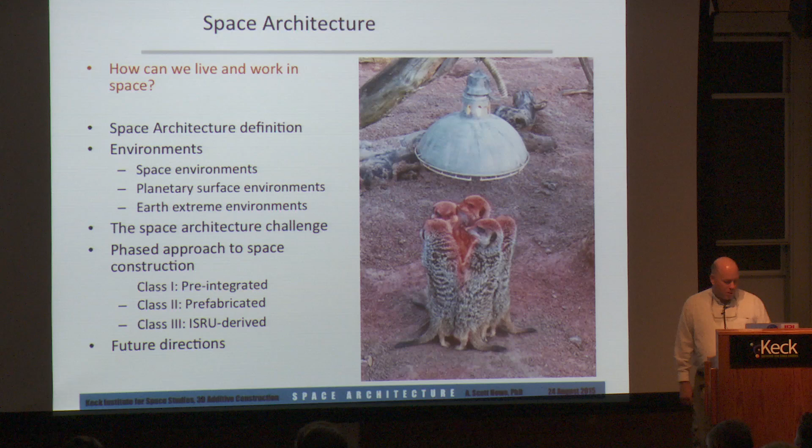And space architecture is somewhat trying to address this, addressing different space environments. Also, we've come up with 3 classes of structures that we are working towards that will give us a phased approach to putting humans out into space for permanent habitation. So with that, there's a lot of definitions of architecture, and this is mostly having to do with earthly architecture. Some of these are somewhat amusing, and some of them are kind of interesting. They're mostly applicable for what we see here on Earth.

In particular, the last 2: Mies van der Rohe was an architect who really prided himself in knowing how the structure and the function worked, and so he came up with the term less is more. Robert Venturi, who was kind of bored with that and wanted more art in it, came up with less is a bore. So there's a lot of different opinions on what architecture means.

However, what we're going off of is the space architecture definition, which takes off of earthly architecture, and we define it as architectural design of living and working environments in space related to facilities, habitats, and vehicles. Designing these forms of architecture presents a particular challenge to ensure and support safety, habitability, human reliability, and crew productivity in the context of extreme and unforgiving environments.

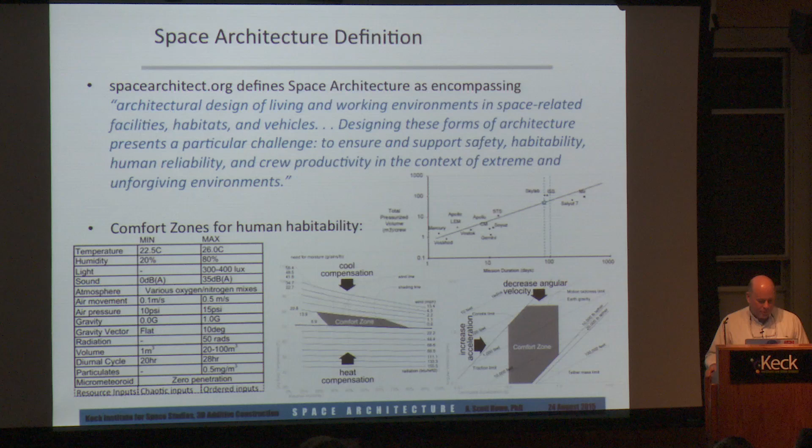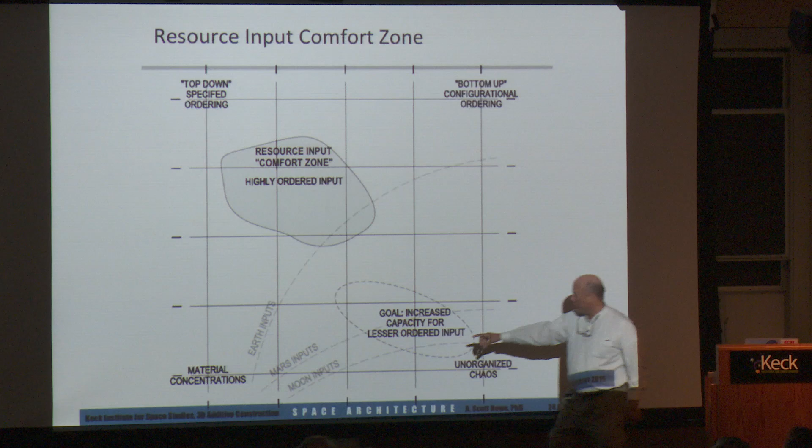That's where we already have oxygen on Earth. We have a kind of a temperate climate. The pressure is already correct. Here we can just walk outside, no problem. So it's highly ordered already. And what we want to do is build in these environments down here, which you can see slightly grayed out, Mars, Moon, and obviously a lot of other environments as well that we can add to that, so that we can mitigate these comfort zones such that humans could live in those environments

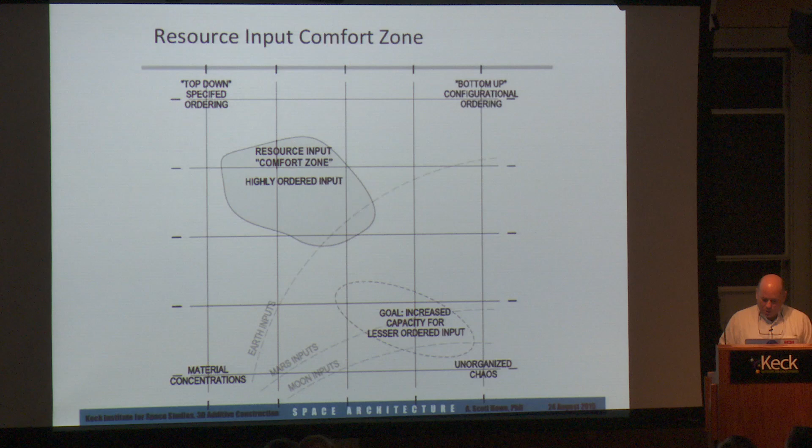as well. So far the realms of space architecture include orbital environments, deep space, and also planetary surfaces such as lunar, Mars and asteroid surfaces as well. And then we also include Earth extreme environments such as polar bases, under the sea, emergency housing after a natural disaster or some kind of chaotic unrest.

As I go through this, we will talk a little bit about some of these environments, but we will put it in the context of how that can influence ourselves back on Earth now. Can we have some rollback of some of that technology as we go along and benefit us here as we go outward as well? So the space architecture challenge then is to try to understand the extreme environment, and to work with the capacity of the transportation system, which is very difficult.

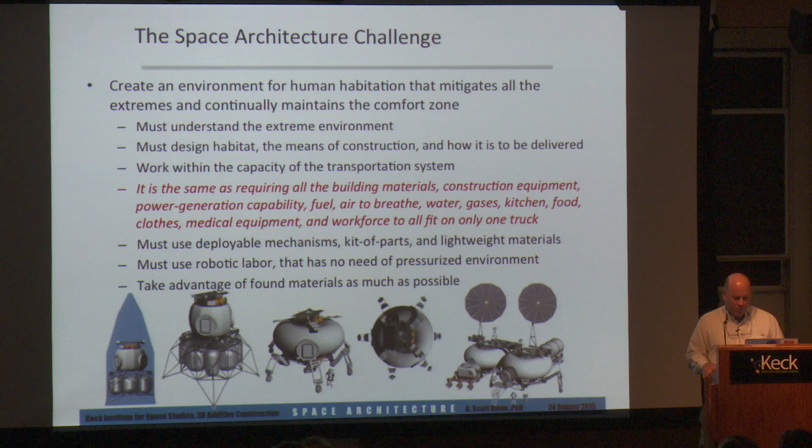So what we've come up with is a phased approach to space construction, which has 3 classes of structures. The first one is pre-integrated. The second one, class 2, is prefabricated, and then finally class 3 is ISRU derived. This phased approach occurs over time, where the technology level gets higher as we go along, and also over time we're able to accommodate larger and larger crews or larger numbers of inhabitants.

So I'm just going to go over these 3 different classes and structure the rest of my lecture around this, and show some of the ideas we've been addressing for building the 3 classes, and then also the actual real tests and things like that we've been doing for prototypes.

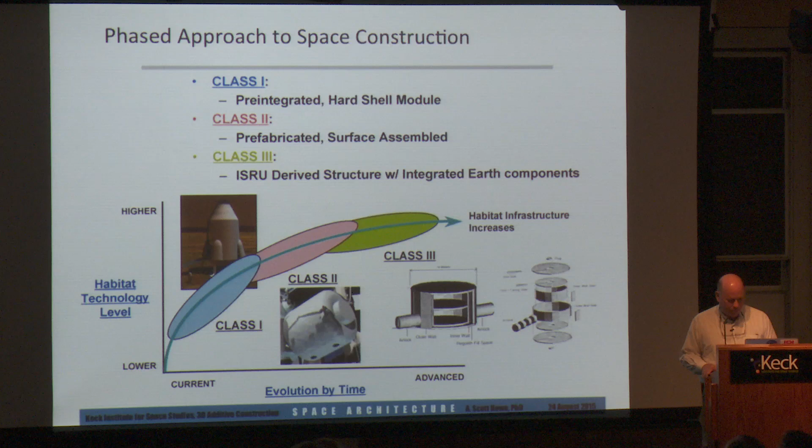And then, of course, in space, the similar example is the lunar module, which was the descent vehicle as well as the ascent vehicle, and the crew lived there on the surface in the module, and there was no assembly required, nothing needed to be done. It was already habitable as it went. So I'm not going to spend that much time on Class 1 because we've already gone past that.

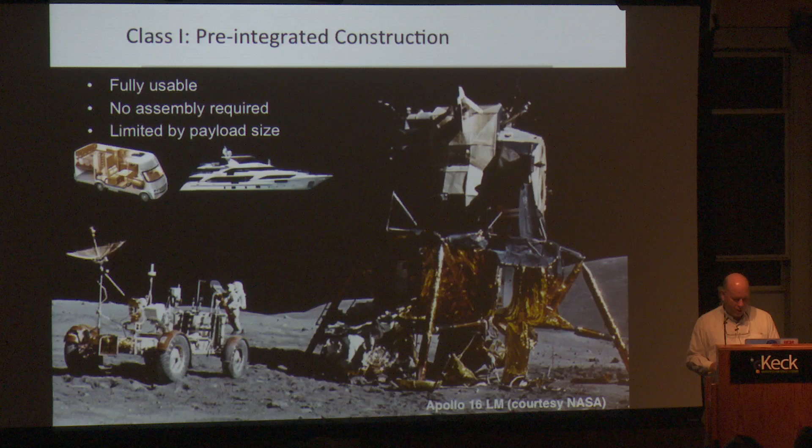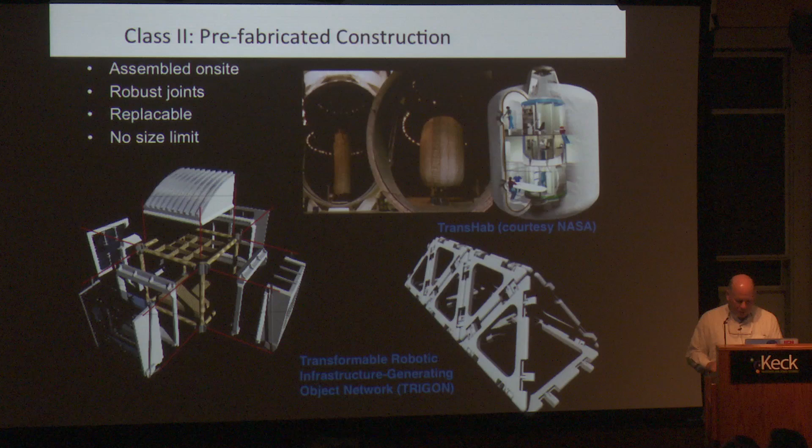The next stage that we've been working on is Class 2, and that requires a little bit of assembly. That's where you have two or more modules or multiple parts that come together. So the example on Earth architecture, of course, is some kind of a kit of parts approach to putting your building together. And we have similar approaches that we've been using for extreme environments, such as a modular type construction system that can be continually added upon to increase the size of the outpost, et cetera, and then also inflatables and things like that. So for Class 2, I'll just go through a set of slides of some of the concepts that we've been working on.

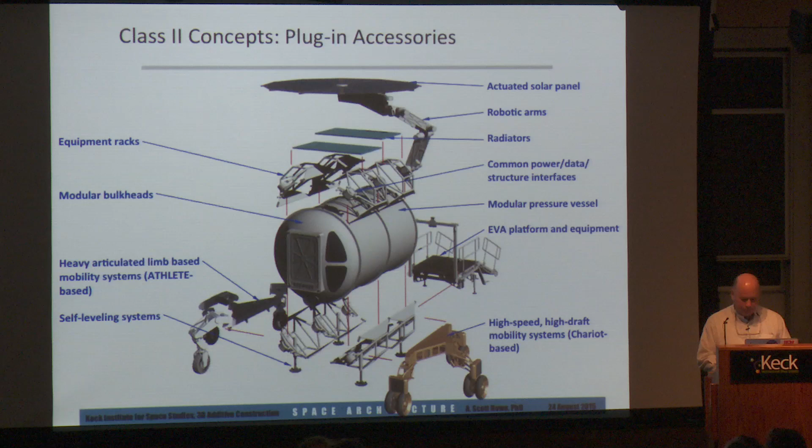This is the concept of using plug-in accessories where you have a core pressure vessel with a variety of mobility systems, a variety of power systems, and different accessories that can plug into that. The other thing that we've been working on is commonality. You take one pressure vessel that could work for a multiplicity of functions, such as a surface rover, a low gravity rover, such as for Phobos, a hopper. You also have a space taxi or a Mars ascent vehicle cabin, et cetera, that could use the same pressure vessel, but you outfit it differently.

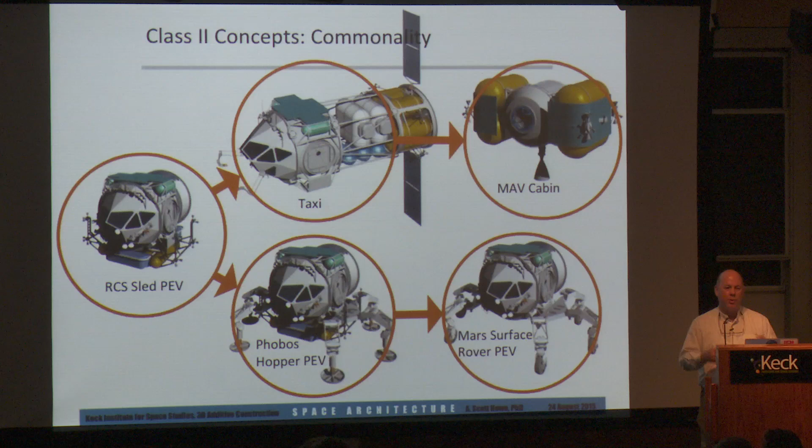Once you get onto the surface, the issues that we have in space for the space station, which is to put several modules together and dock them together in that zero-G environment, start to have a little bit more difficulties because you have uneven surfaces and things like that. So in order to do that, we have to start coming up with clever ways of docking and connections, because no matter what site you choose, it's not going to be flat unless we process that site or flatten it out. And even then, there's probably a little bit of leveling, so we'll have to create ways of docking those together and have a little bit of flexibility in that.

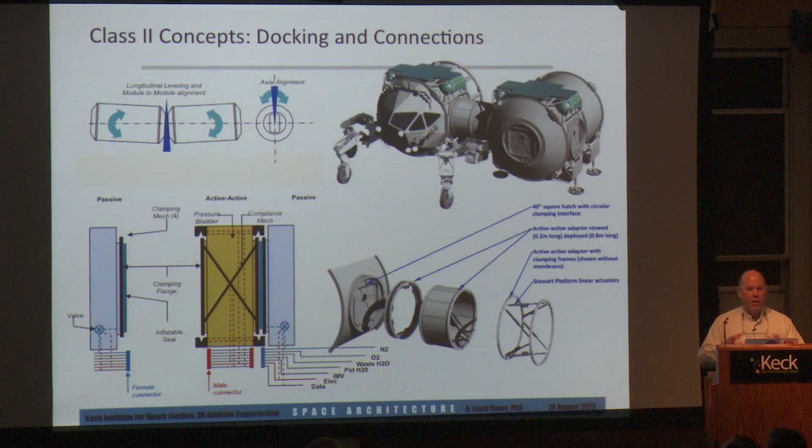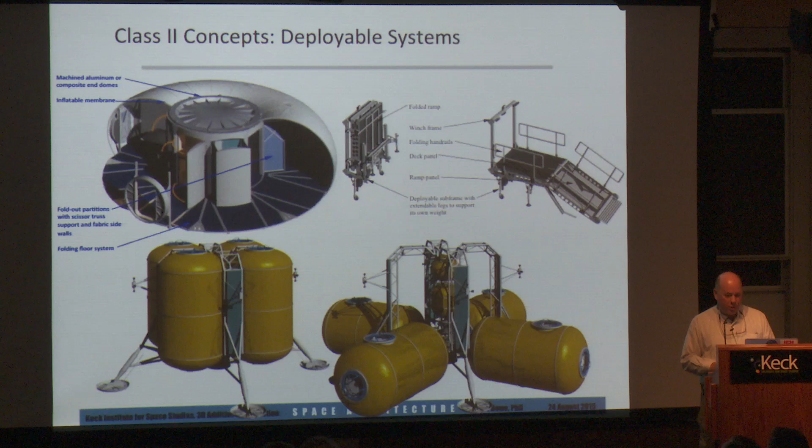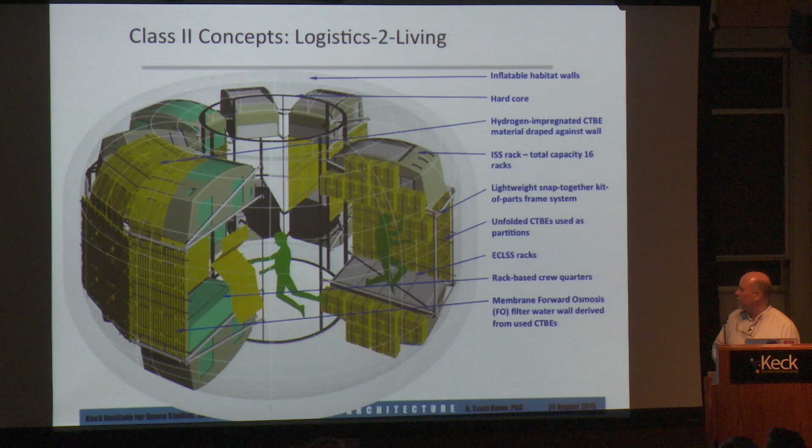Earlier, Rob mentioned reuse, and Phil also mentioned a little bit of that, the reuse and repurposing of current stuff that you already have. In this case, we call this logistics to living. We are using CTBs, which are, anybody recall what CTB is? Cargo transfer bags. It's a small one-person handleable piece of cargo, and for a long mission, you would have literally hundreds and hundreds of these bags, and that's a lot of packaging material. So as you empty out each of these bags, you could take them and create partitions out of them, use them as extra shielding and things like that. So it's kind of a way to repurpose some of the material.

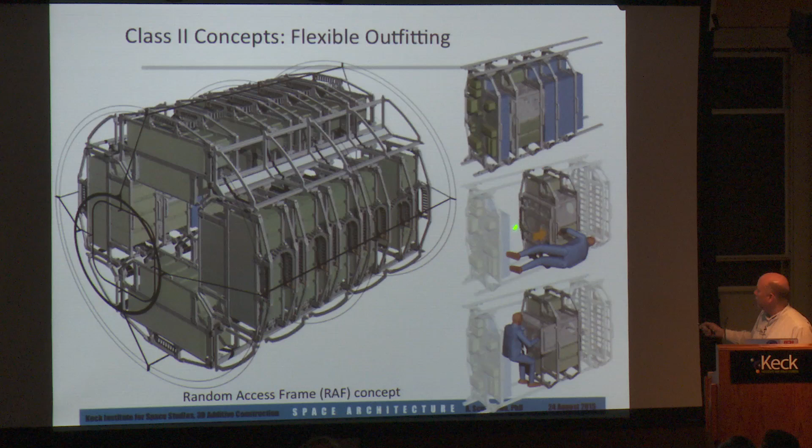In a similar way, there's using flexible outfitting, where if you have a set of shelving that's packed full, if it's on rails, similar to a library book shelving system, as you start to use up some of the stowage and some of the food, then you have corridors appear, and you can move your workstation back and forth to create a workspace on this side or the other side, depending on what kind of activity you're doing.

Another one is if you create all of your hard elements like a kit of parts that can be disassembled, then you come up with all of your stowage. Once that's being consumed, then you have another stack of materials. Those could be shredded and maybe melted into plastic feedstock for a 3D printer to do things all over again, whatever you want to do next.

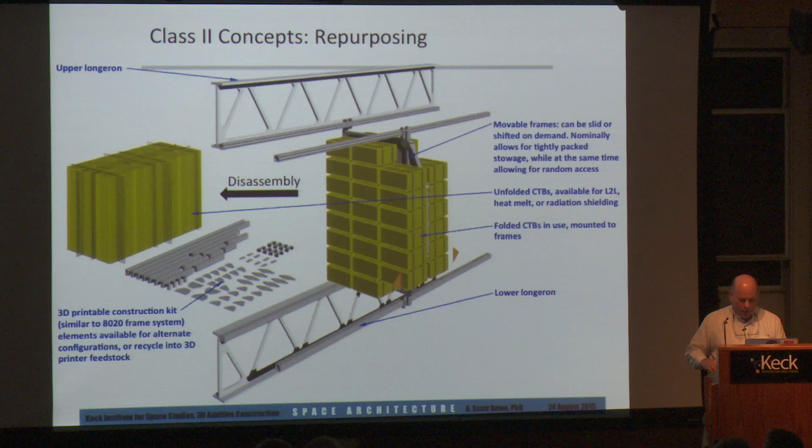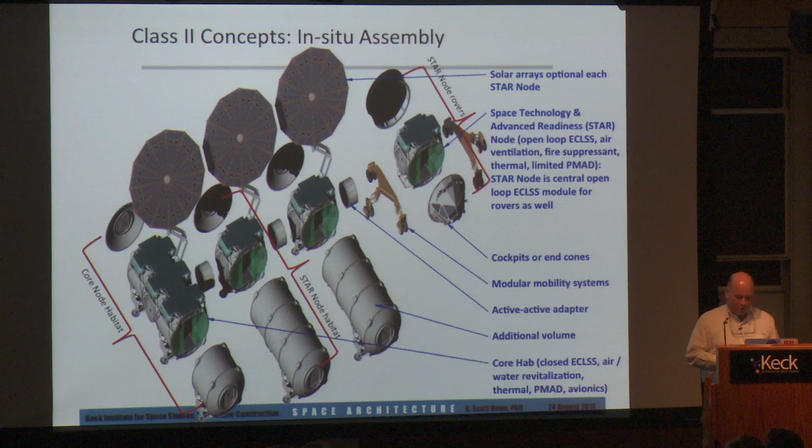This being the same core that's used in the habitats is used in a rover, and that rover then can go off and stay away from the outpost for a few days, but then it has to come back and recharge itself. And so that is bringing up the concept of an expandable outpost, where you come up with ways of putting more and more of these modules together, depending on the size of the crew, and the various life support systems and power systems are all modular that build up to support that as we go along.

Now, our fourth speaker, Brian Wilcox, will be talking a little bit more about this, the robotics of it. I wanted to put this particular slide in here because one of the most important things that we must know as designers is that it's very complex. There's a lot of things that need to be included into the design, a lot of parts, and the whole key to everything is managing the complexity and putting it into more manageable units, organizing that into modularity and organizing into things that are possible with just a few minor high-level manipulations or commands.

So this particular part right here is that we need to understand the material handling of even the smallest parts. And this is especially true with robotics, because you'll see a lot of concepts out there that say, well, we can do this and this and this, but when you get into the details, you realize that there's a lot of magic going on under there. They don't realize what the material handling is of the smallest details, and you realize that that's where the concept ends up not working very well.

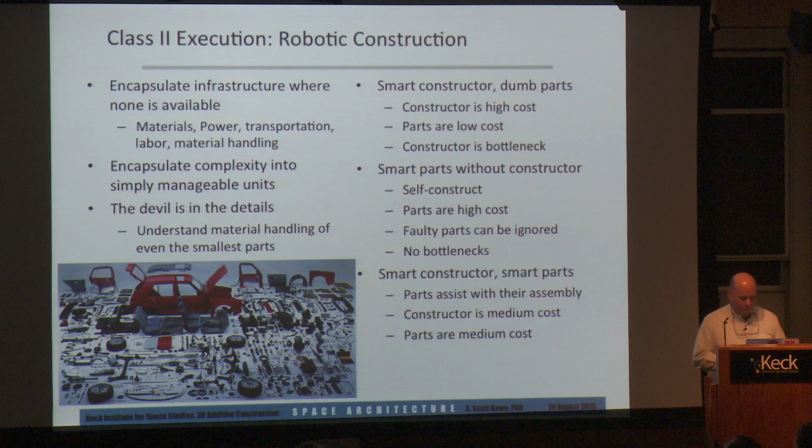So then on the right-hand side, when we start to look at robotic construction and how habitats and buildings and things like that can come together, there's kind of a range: on one end you have a smart constructor with dumb parts, and on the other hand you have smart parts with no constructor at all. And so you can have a combination of all of those in between, and I'll talk a little bit about some examples of those. And I think probably Brian might have even more detail later on.

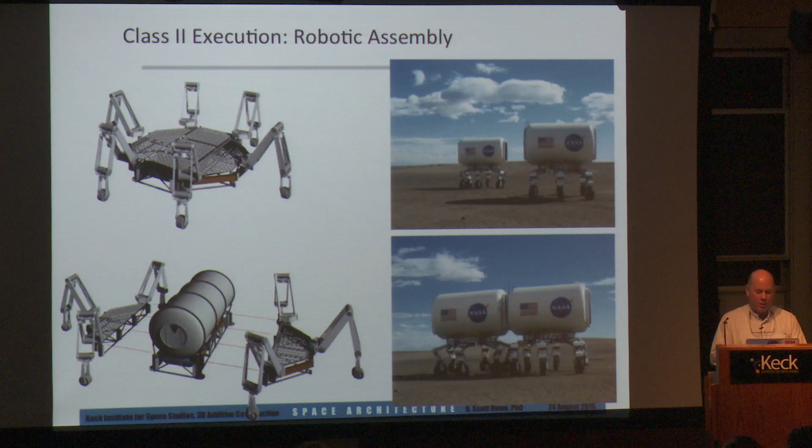One, I know Brian is going to talk about Athlete a little bit later. This is one of NASA's current methods for putting together multiple pressurized modules on a foreign planet surface, and that's using Athlete, where you have the two halves of three-limbed vehicles each able to sandwich the payload, bring that over to a place, set that down, and then go get another module to slowly put that together. And I'm sure Brian will talk a little bit more about that in detail. So as a result, any number of modules can be assembled together without crew being present.

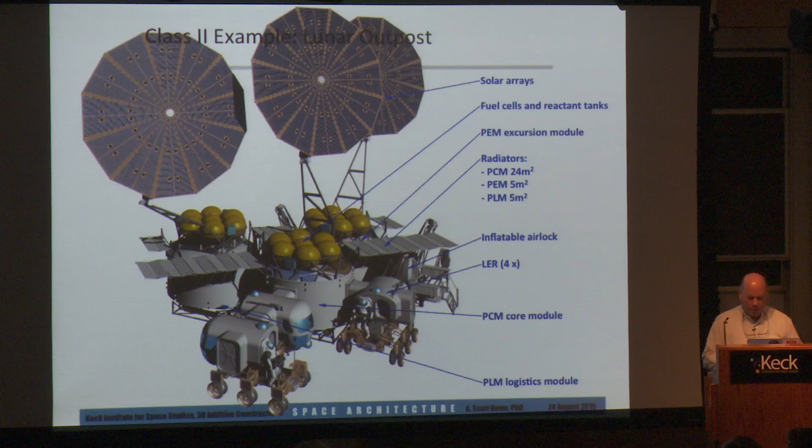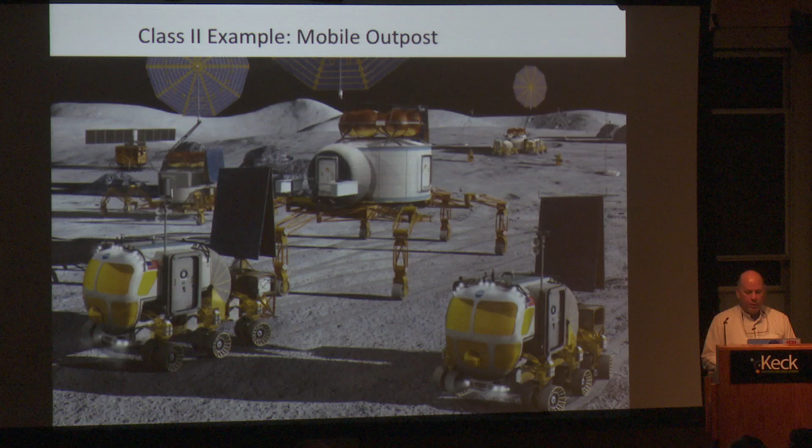So an example that we worked through to test some of these ideas was the lunar outpost that we did a while back under Constellation. And this is an image showing what the final configuration of that was intended to be. It had three habitable modules with multiple rovers, and we built one of the modules, and that was a mobile part of the module which had integrated into it the Athlete, and that would follow the rovers along on the surface and provide extra supplies and things like that for the crew as they went along on the smaller rovers.

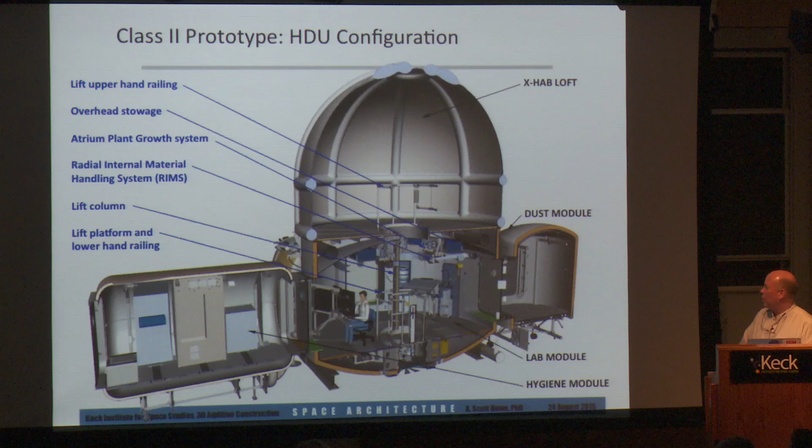It's the habitat demonstration unit that we built and tested out in the desert using a configuration of multiple modules. The bottom was a hard can cylinder with a dust module, which is actually an airlock, and a hygiene module, and then an inflatable structure on the top for the habitat. So I'll just flip through some of these. These are just examples of some of the equipment that we put on the inside. This is all an example of Class 2 modular construction, putting these modules together and working out how multiple modules, even if some of them are mobile, come together, dock, and how those would work together.

There's a big, long process of pre-breathing that you have to do, because, as we heard earlier, 10 psi is the typical lowest cabin pressure, but your suits can't be 10 psi, because if you are in a fabric-based suit, you would end up being spread eagle and you can't even move your arms. And so the suits have to be even lower. They have to be maybe 4 psi or so. And so with that, it's a serious oxygen and atmosphere mixture problem, and the crews have to go through this long 6-hour process to get in the suit, go outside, pick up the rock, and whatever.

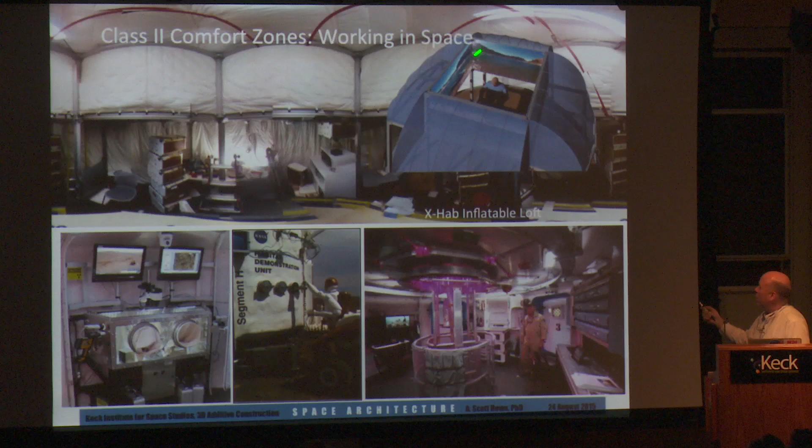And in one test that we did, we had a person inside the habitat, and then we broadcast live video from a vehicle from 4 directions up onto that, and this person directed the person in the vehicle to drive around and was able to immerse themselves in that environment as a way of participating in the work that was going on.

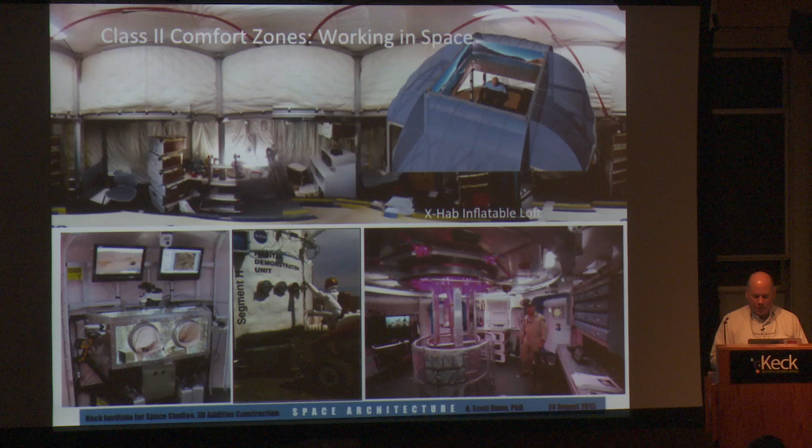Okay, so class 2. Obviously, there will be bridges as we get from class 1 to class 2 and then finally to class 3; there will be little ways that we will overlap. So class 3 is what we call in-situ construction. That is where, instead of taking all of the pieces and all the parts and organizing all that and bringing it with us, which is still quite massive, especially if you have large outposts, you will want to start to use some of the material that's available around you, and that's, of course, what this workshop is going to be about.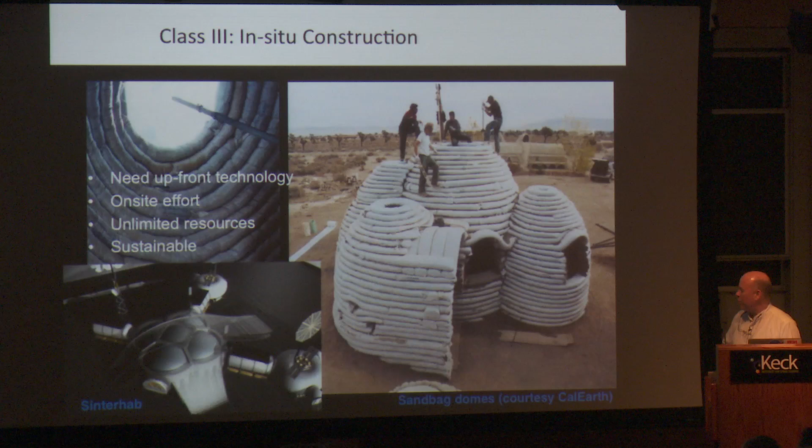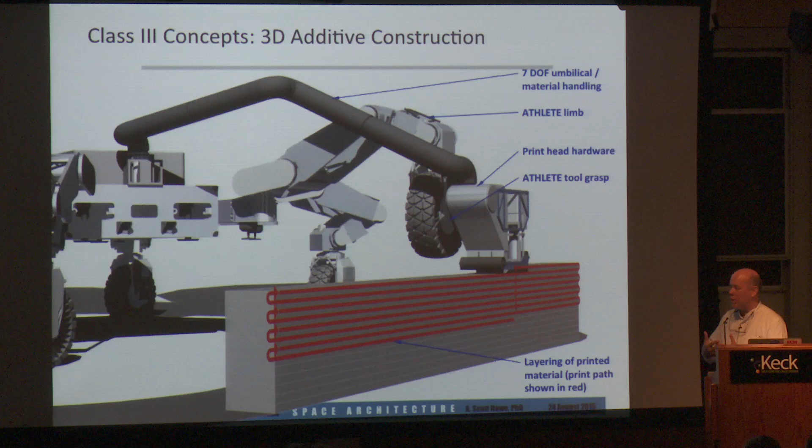Then the space example, which I'll show a little bit later, is the Sinterhab, which is a large 3D printed habitat. The concept for 3D additive construction is that you are able, at a very large scale, to take some of the materials that Phil mentioned earlier, some of the particulates. You have to be careful about what the particulates are and how they will move through some kind of conveyor system that goes to the print head, and then you either bind or heat that in layers to make different kinds of structures.

Various types of power are going to be needed. For instance, these two examples are using heat to do the binding, whether it's sintering, S-I-N-T-E-R-I-N-G, or some type of melting. The top one is a solar concentrator. This uses hardly any energy at all, but requires a large area of lenses to focus the heat down through fiber optics to the point where you're delivering this material.

The other one, which would use either some kind of nuclear power or solar arrays, would require a tremendous amount of power in order to get the heat that you require.

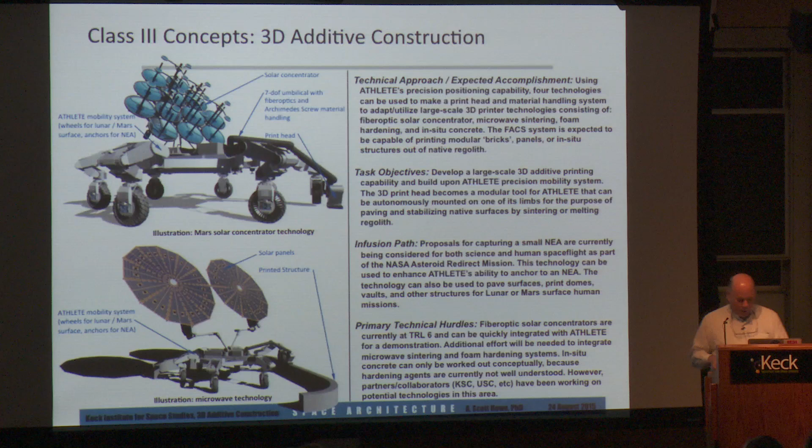So for precision positioning, some of the concepts that we looked at were the ability to have a platform that has very precision positioning of the print head, and also a way to hold the various equipment that's needed for power and also for regolith processing, etc.

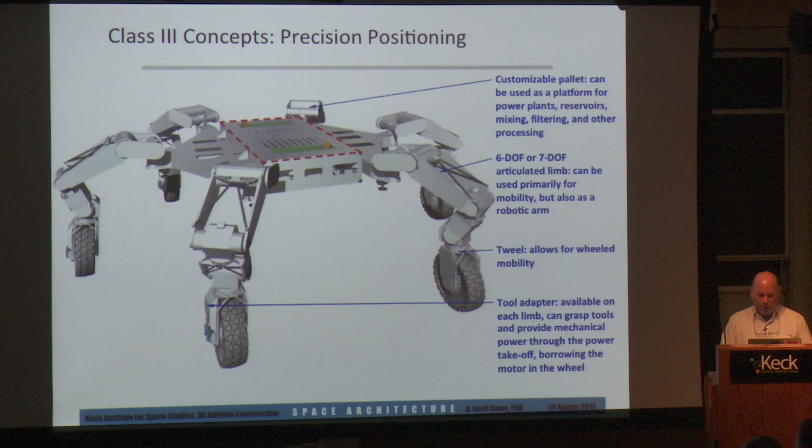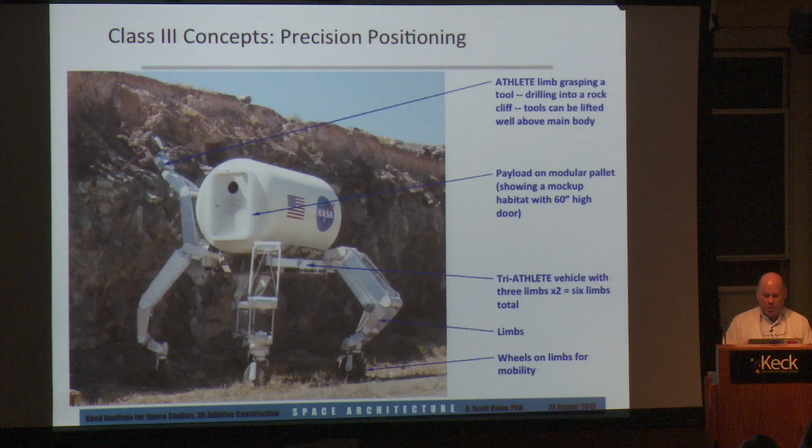So from our studies, we use the ATHLETE as a platform that is able to not only use the limbs down below, but also up high to create a very large range. If you had a printer up on that arm, you could print very tall walls and things like that. So putting these together and having a modular pallet that is specifically made for printing, and then using various means of material handling to get the material to the print head.

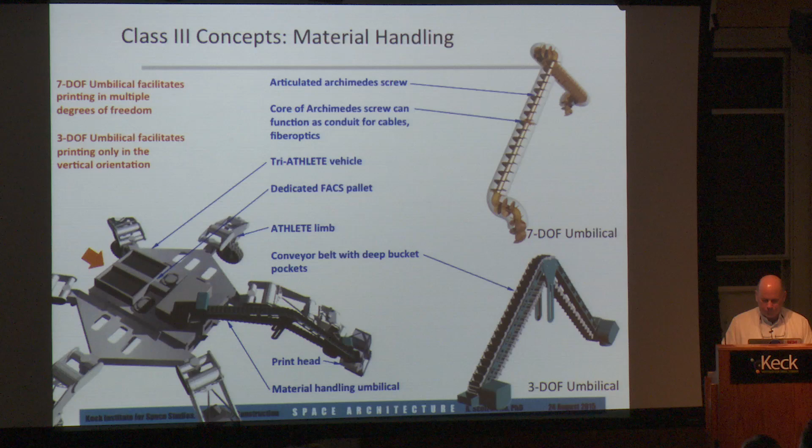So in execution, possible applications of this, and in our workshop we'll expand beyond this and try to brainstorm a lot of ways of executing printing and additive construction processes and things like that. But in this particular example, we start off with a module that has an airlock on it and an inflatable liner stowed on the end.

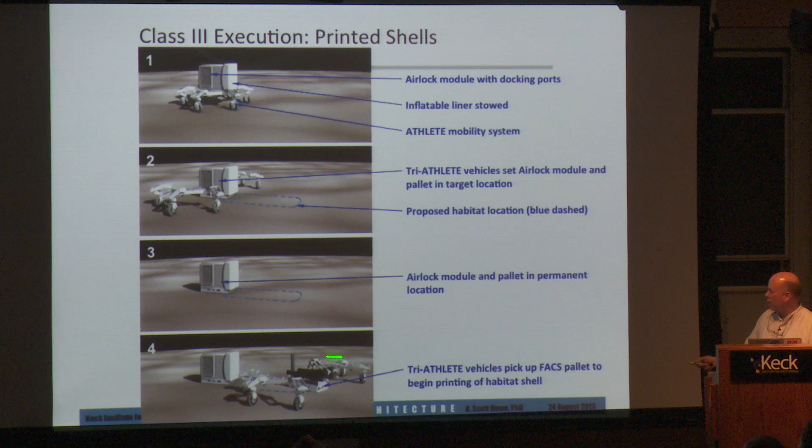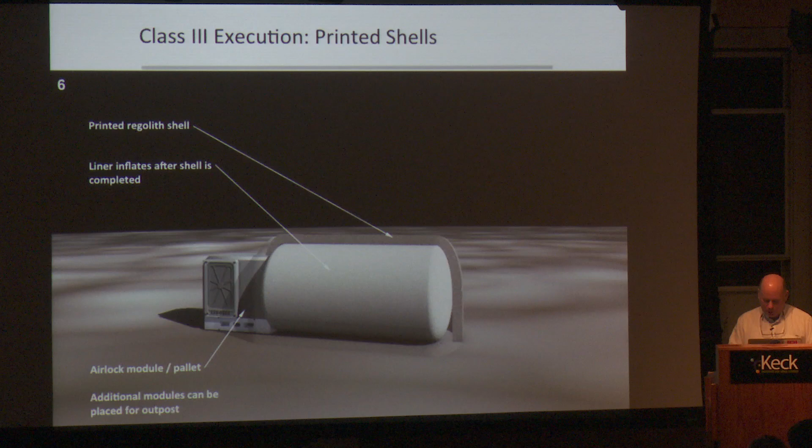You set that down on the surface where it's going to be permanently, and then you go back and you pick up the additive construction pallet, and then around that airlock you begin to print vaults and domes and things like that, whatever you need to do. And then finally, when that shell is created, you inflate the liner for the atmosphere. That was some of the concept behind SinterHab, which was done by some students a while back.

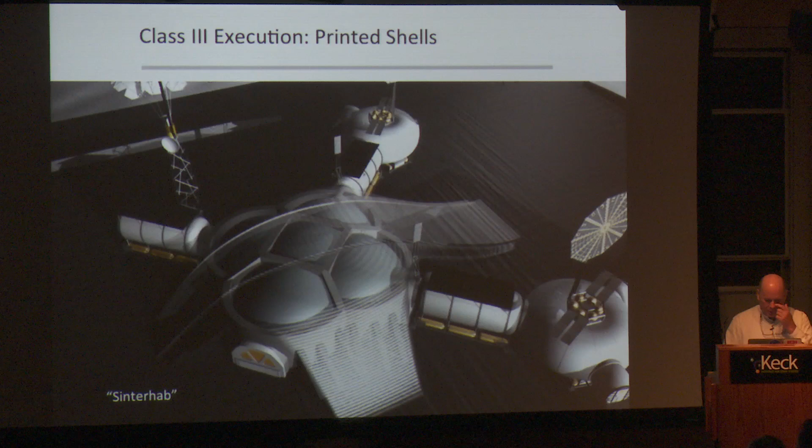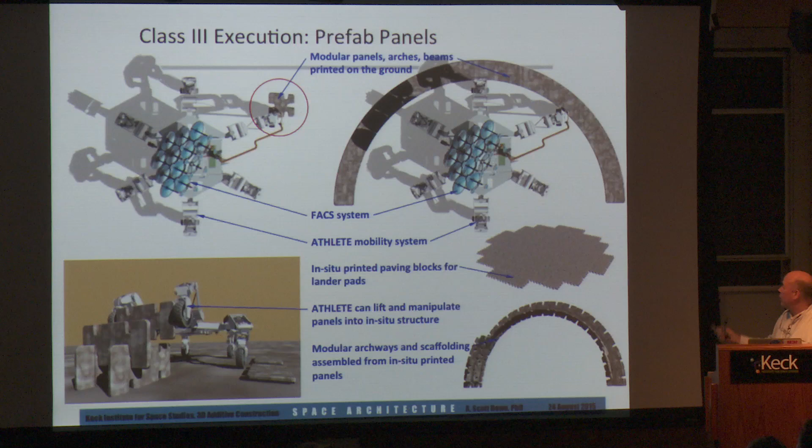Another possibility is not only printing in place, but also creating prefab panels and things like that, where you start off with a mold and then you sinter in place what those panels will be. And the one on the left is showing the panels being constructed into place using a series of slots that will give you a 3D structure. If you had the scaffolding, you could create full arches or create an arch just as a printed piece and then tilt those up into place, like tilt-up concrete.

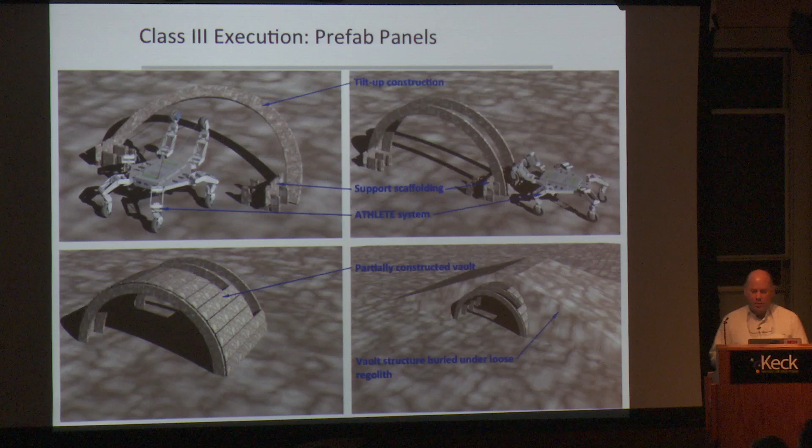And then finally, once you have the roof in place, you can bury that with 7 meters of regolith if you want. So this one is showing an unpressurized garage that you drive the habitat in and set it down, and it has some measure of protection underneath that garage.

With that then, Phil brought up a very interesting concept. He brought up the study that was done in 1980 by Freitas and Gilbreath. They're the editors of the final report of a self-replicating factory. And one of the things that space architects like to do is to take all the complex issues that are in a problem and see if they can modularize it and take that into something that will carry through all the way to the end and be applicable in every step of the way.

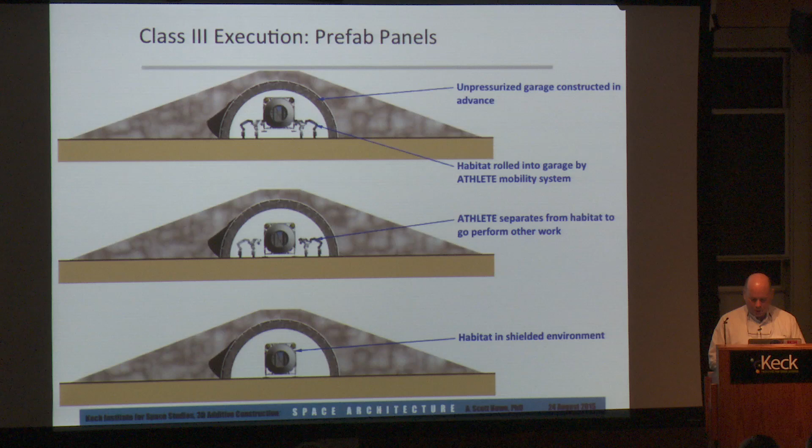And so just to finish up the last part of what I had prepared, I wanted to show some work that asks some of these questions, and ask, can we take this through 4 phases. The first one is the easiest, self-constructing, then self-assembling, and then self-manufacturing, and then finally, how far can we get to self-replication?

The beauty about this is that every step of the way is going to pay off. It's going to pay off because you're reducing power, you're reducing materials and things like that you have to bring from Earth, even if it's just a little bit, and you slowly ease into it. So the exercise that we went into is, what if we came up with a module that creates a frame that's articulated on the edges with robotic means to flat pack it together.

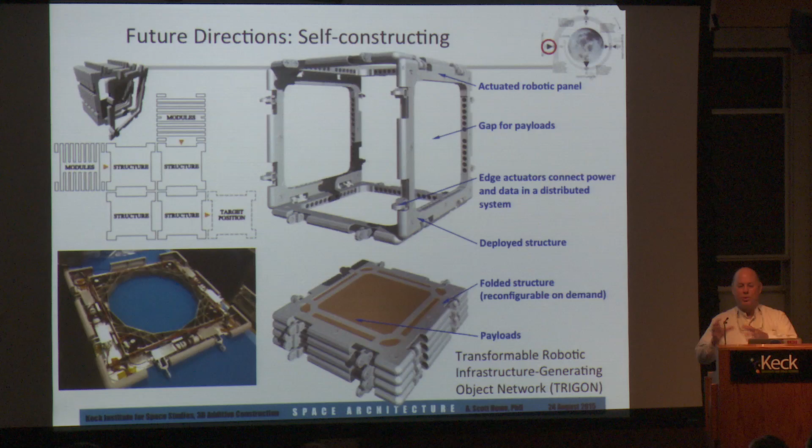In the holes in between, you can put specialty payloads, whatever that happens to be. There's the actual version that we're working on, hardware, such that when you put these flat packs up to a structure, they unfold and they fill out a structure. So you can put this flat pack anywhere, and the modules will move themselves across the surface. And our method for doing that is the panel will connect itself to the existing structure, flip itself over, tie itself again, release here, and then continue to go.

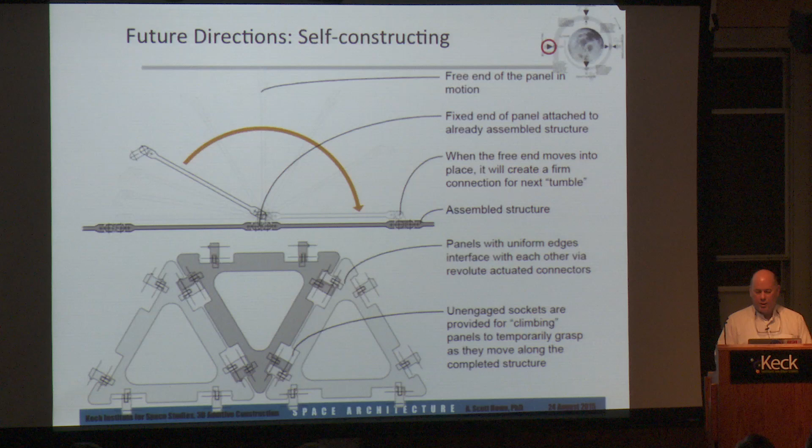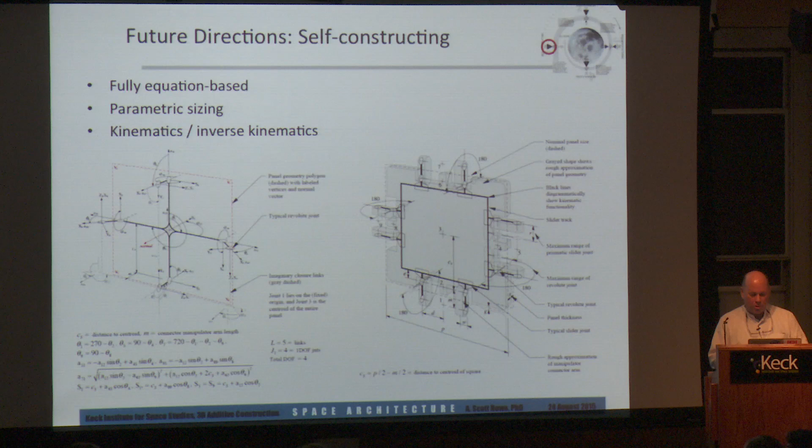Then with that kind of self-constructing mechanism, you have a method of building structure. Then you can start to fill that in with whatever kind of functionality that you need. In this case, it's fully equation-based, and we're able to work out the kinematics. The grid of it creates a known environment rather than a chaotic environment. So you're creating your own known environment inside that you can address for all of the other functions that are coming along.

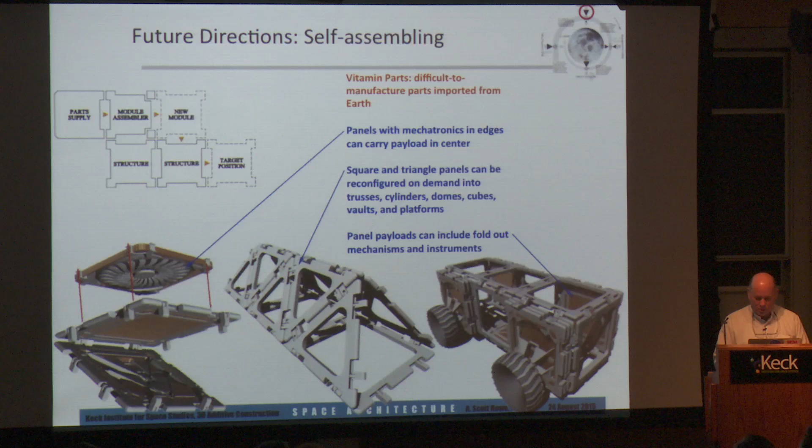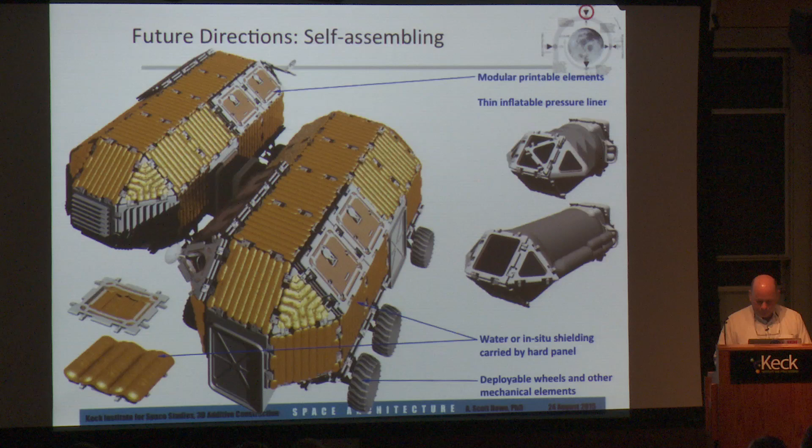So the first step then, once you get the system ready to go, is to be able to create a variety of other payloads, such as fold-out wheels for mobility, avionics, and a variety of other systems that could help fill in all the functionality that you need, including pressure vessels. So you can use the triangles and the squares to create a shell within which you use the inflatable liner for that pressure vessel. So just a few more. We're still in the self-assembling stage.

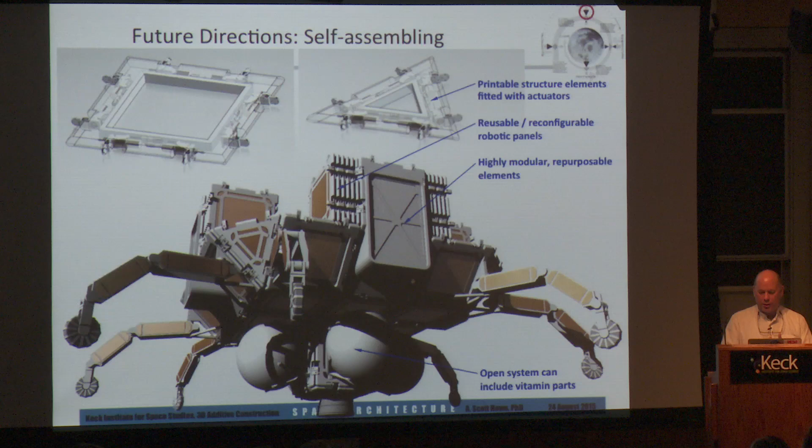Once we have that, then we could use this cube as a means of creating a portable factory base. And what this is showing right here is a cassette factory, where the cassette factory has dedicated payloads in each of the faces. You have a front face and a back face for material handling to get through. And so as an initial raw material extraction factory, so to speak, you start off at one end with the raw regolith supply, and then at each of these cubes you have 4 payloads.

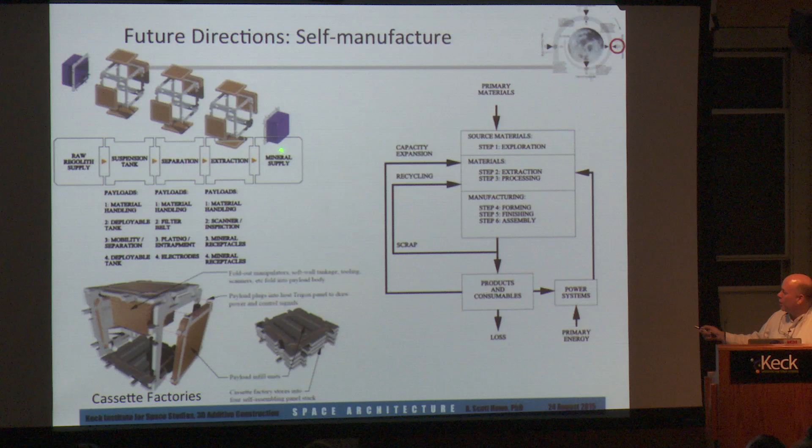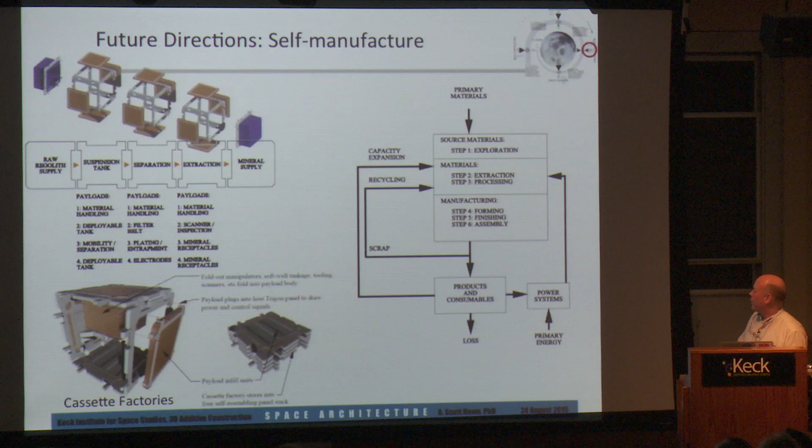And of those payloads, the top one is material handling, tankage, and then each of the payloads is all specified for running raw regolith over to an extracted regolith supply. So this is just one example of one factory put together for one set of processes that will eventually begin to fill out. And Phil, you probably recognize this diagram as one of the things that was in that report that you mentioned earlier. All the processes that would be needed for an entire factory that would be applicable on the surface of either the moon or Mars.

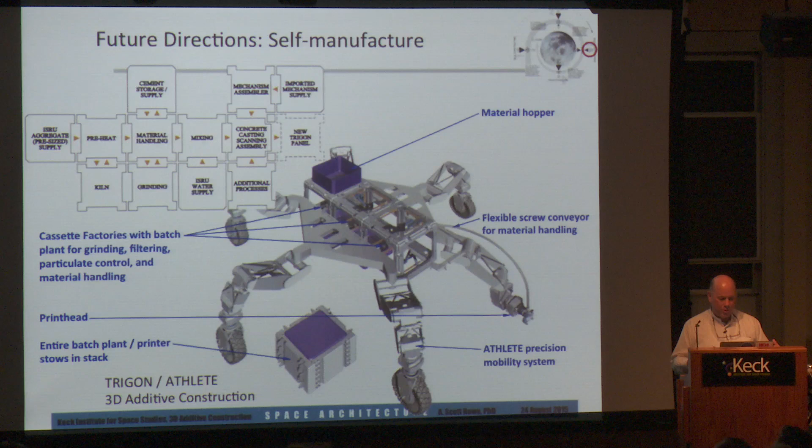So starting off with some of the 3D printer using ATHLETE, taking the portable cassette factory concept. This is the diagram for a batch plant for some type of a cement that could be used. You start off with the rough aggregates, supplies, various parts, et cetera, till you get to the end to create all the processed materials that go through all the way to the end that will eventually get printed.

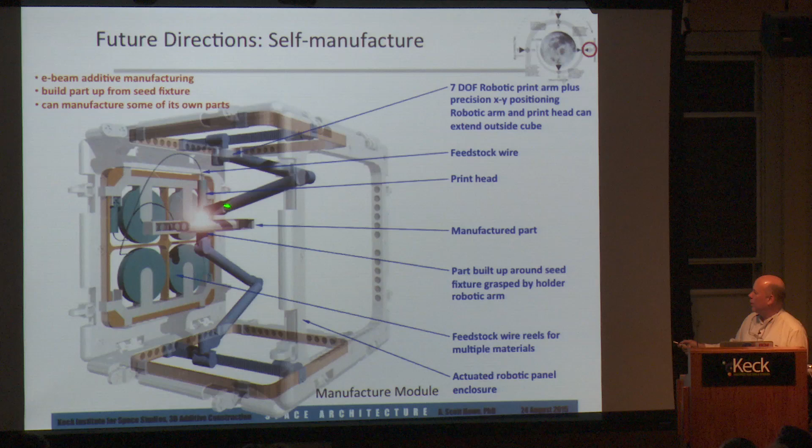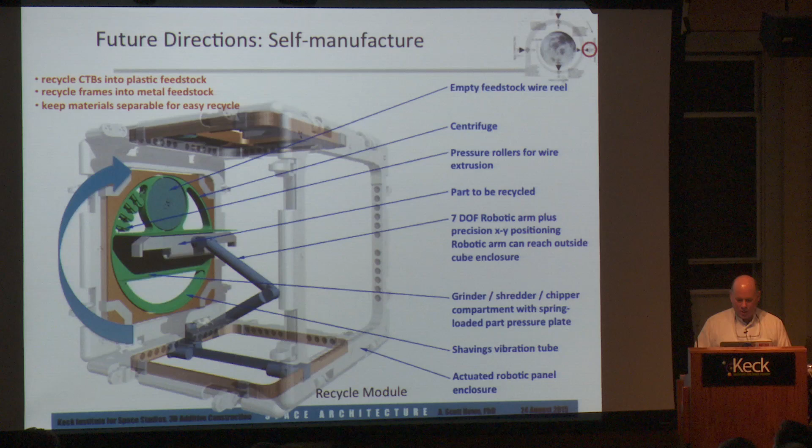So further zooming in on this, these cassette factories, one could be dedicated for 3D printing, such as you have reels of feedstock in the back, a material handling arm, and then a printer arm to create the manufactured part. Going the other way, taking the manufactured part that is maybe defective, put it into a centrifuge which spins that around, grinds it down, and you end up creating more filament feedstock again. So you have a way of going backwards and forwards with all the things that you're creating to reuse what you've done already and continue the use.

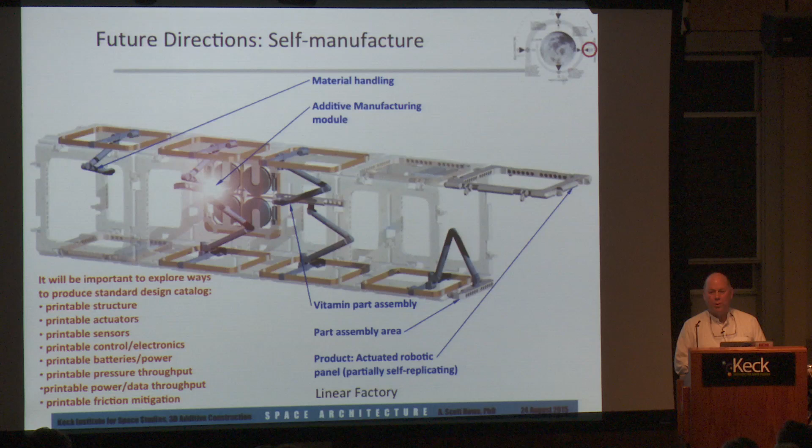So you put these cassette factories in a row for whatever process that you need to do, and then this is showing we're in the self-manufacture stage over here on the right, where the factory is printing portions. You're bringing in what we call vitamin parts. Vitamin parts is a way of saying parts that are difficult to manufacture that are brought from Earth, and you plug those into what's being printed.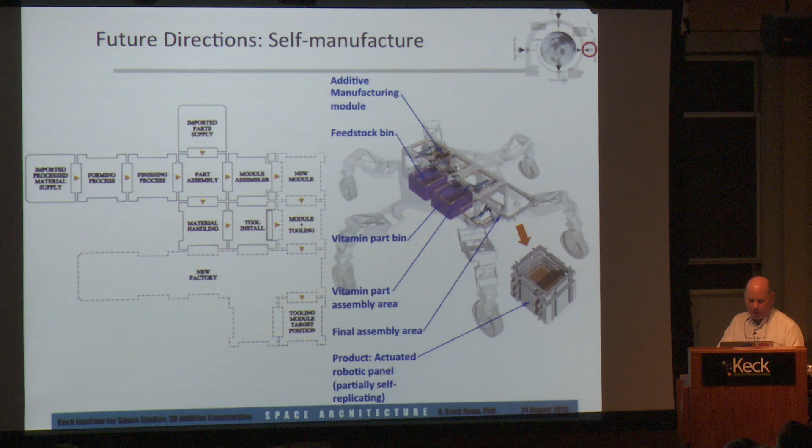And then finally you're able to create a stack of its own panels, and then hopefully we'll get to the point where we could just slowly add processes to slowly reach the self-replication state. We don't ever have to actually get there, just to get close. The closer you get, the better it's going to be. And that's it.